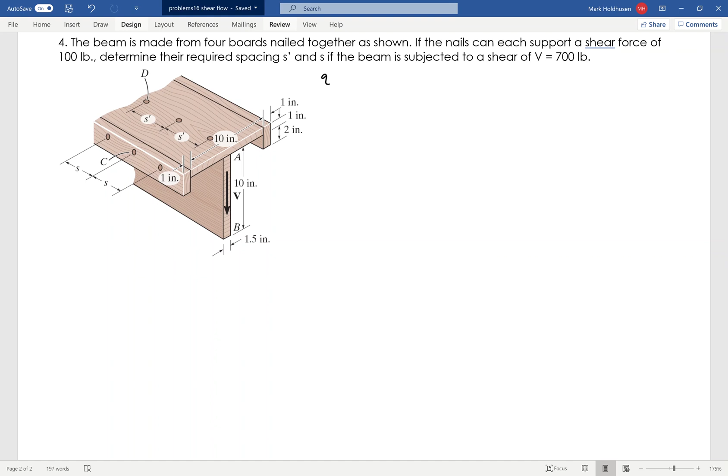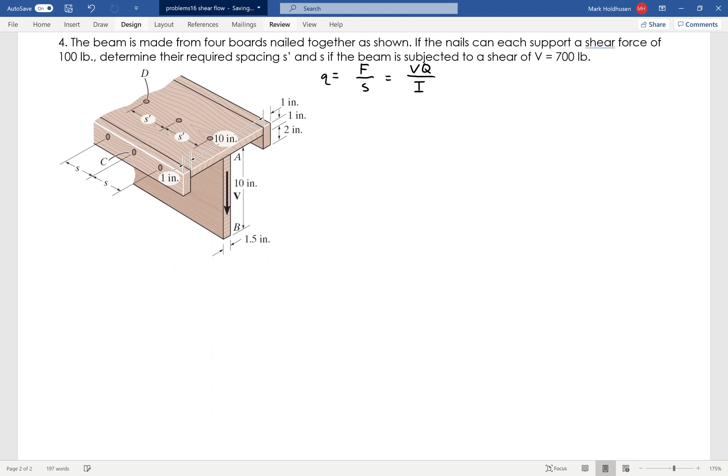So again, the equation I'm going to use is lowercase q, which is the shear flow, which is the force per length, and that equals VQ over I. So the force will be the 100 pounds. The spacing is what I'm trying to find. V is 700. I'm basically looking for Q and I. So let me start by finding I, because I'm going to have different Q's on this, and we'll come back to that in a second.

So I need to find I about the neutral axis. So I guess the first thing I need to actually find is the neutral axis. So break this up into some chunks here. So from the bottom, the first one is going to be 5 times

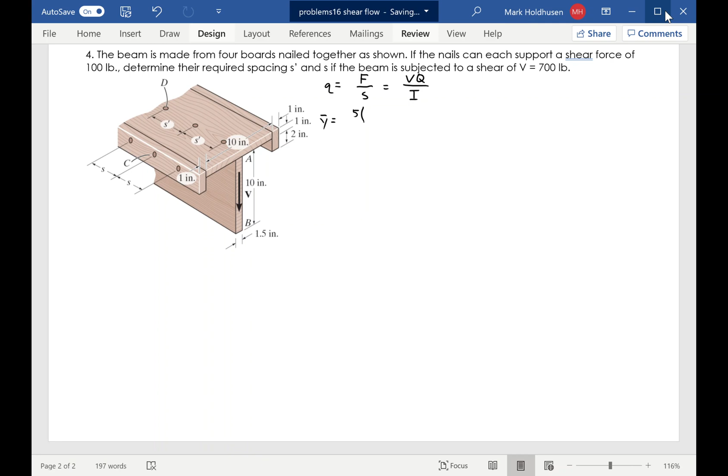Pardon me. Okay, I think we're back to looking good.

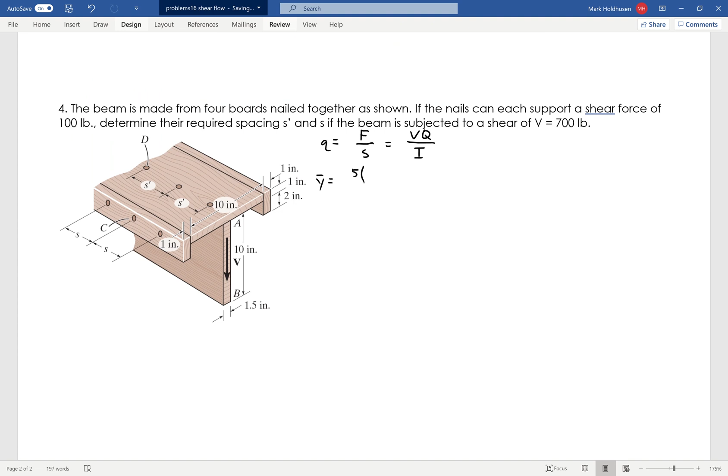Sorry about that. So that's going to be 5 times 1.5 by 10. Then I'll have the next one, which is 10.5. That'll be the top one. The location is 10.5, and then it is 10 by 1. And then I've got two of these little guys. 9.5 is the location. So 2 times 9.5, and then they're 1 by 3s. So 9.5, 1 by 3.

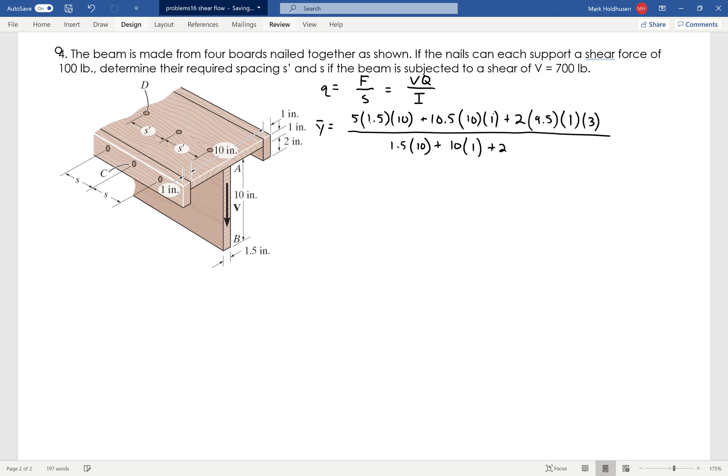And then I've got to divide that by the total area, which is 1.5 times 10 plus 10 times 1 plus 2 times 1 times 3. And I find that the centroid, the neutral axis, is located at 7.645 inches from the bottom. So now that I have that, I can find I, and then I'll move on to the Q's.

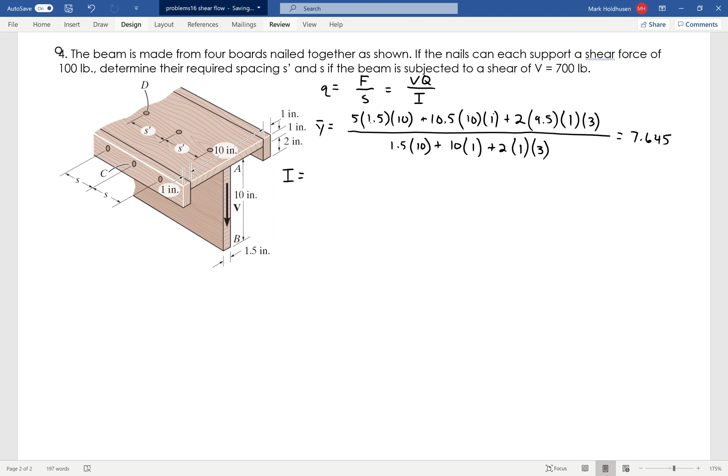So I again is going to have 4 pieces. I'll start with the big one. So this is going to be 1/12 BH cubed, where B is 1.5, H is 10 cubed. Then plus 1.5 times 10 times 7.645 minus 5 squared.

Go to that top one there, so this can be 1/12, 10 by 1 cubed, plus 10 times 1 times, and the center of that one is 10.5, so from the neutral axis, minus 7.645 squared. And then I actually have 2 of these guys, so let me put a 2 out in front.

Because I got 2 of the little guys, and then BH cubed, which would be 1 by 3. So 1, 3, and then 9.5 minus 7.645. Again, that's the location of the center of that guy from the neutral axis, squared. So all of that gives me an I of 337.43. Okay, so now I've got I.

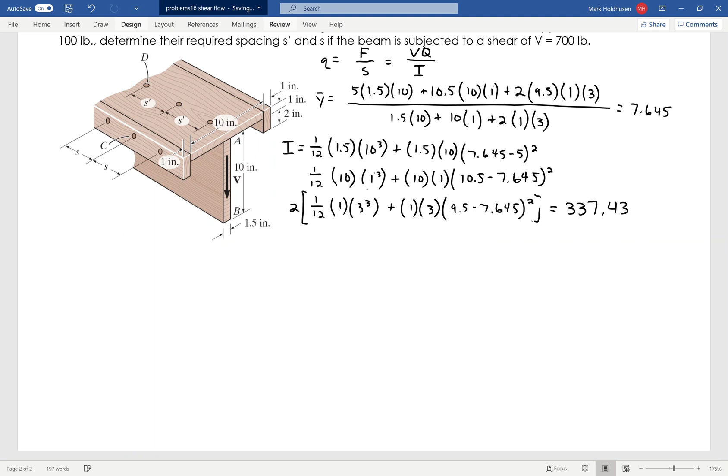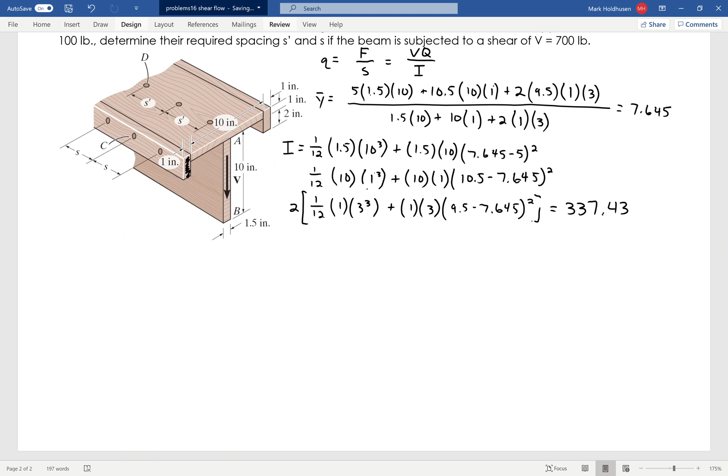Now, here's the thing. I've got 2 Q's that I need to look at, right? I need to find the spacing. So I'm going to look at this guy right here, which we'll call Q, and then we'll have Q prime for the S prime. And rather than looking at the top one where it's got 3 different nails coming in, I'll actually look at this bottom one right here. So we'll call that one Q.

So do it right here. We'll say Q. Now this is for those little guys. That's going to be y bar prime times A prime. So y bar prime is 9.5 minus that neutral axis, 7.645. And then A is just 1 by 3, right? So Q on that guy is 5.56.

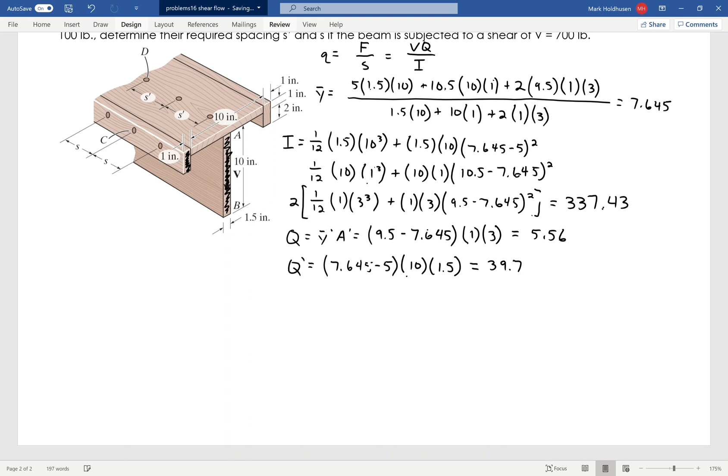And then Q prime is going to be that tall up and down guy where it's located at 5 inches. But from the neutral axis, it'll be 7.645 minus 5, and then its area is 10 by 1.5. So the Q of that one is 39.7. So now I can find S and S prime going back up to my shear flow equation.

Remember, each nail can hold 100 pounds. So we'll start with S, so that'll be 100 divided by S, and then V is 700. And really the only thing here that changes is Q. So for this Q, it's going to be 5.56. I will be the same for both, and I is 337.43. So from that, I know that the spacing on the 1x3s has to be every 8.67 inches.

Those aren't seeing a whole lot of shear on there, so I can have some pretty far spacing on that. You'll see very differently on the next one where I'm finding S prime. So again, each nail here can still see 100. The difference here is going to be the Q. So instead of 5.56, I'm going to use 39.7. V and I are the same as they were before.

And this is going to cause S prime, the spacing of those top ones, to be much closer together. It's going to experience a lot more shear flow going on there. And that spacing is 1.215. So they have to be basically every inch and a quarter, which is pretty often. A lot of nails going along that way to withhold the shear flow that comes with a